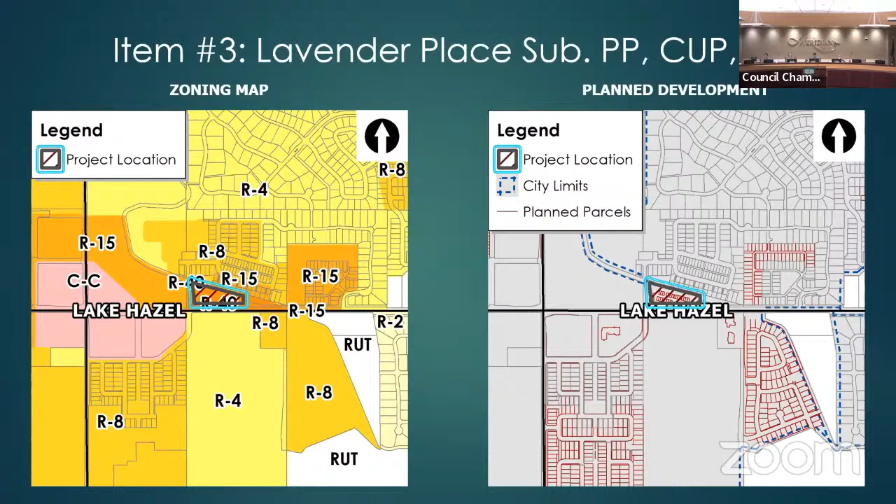The application is for a preliminary plat consisting of 4 single-family attached building lots and 26 single-family townhome lots on the 3.8 acres, a conditional use permit to construct the townhome lots within the R40 zoning district, and as noted, a private street application for access and 3 alternative compliance requests for common drive standards, private street standards, and off-street parking.

Lavender Place was annexed into the city in 2020 as part of Lavender Heights. As part of this annexation, the subject site was approved with the R40 zoning district.

The applicant is proposing the project to be largely alley loaded, with all but 2 of the proposed units fronting on green space to comply with the private street applicability standards. Subsequently, multiple detached sidewalks are included for added pedestrian connectivity through the site, with the proposed plat of 30 residential units and the requested land use of alley loaded single-family attached and townhome units.

The applicant is introducing a new housing type to the overall Lavender Heights subdivision. In addition, the proposed placement and site design offer great pedestrian connectivity to the nearby Discovery Park, which is directly to the south across Lake Hazel. It also has great access to the remaining open space and amenities within Lavender Heights to the north.

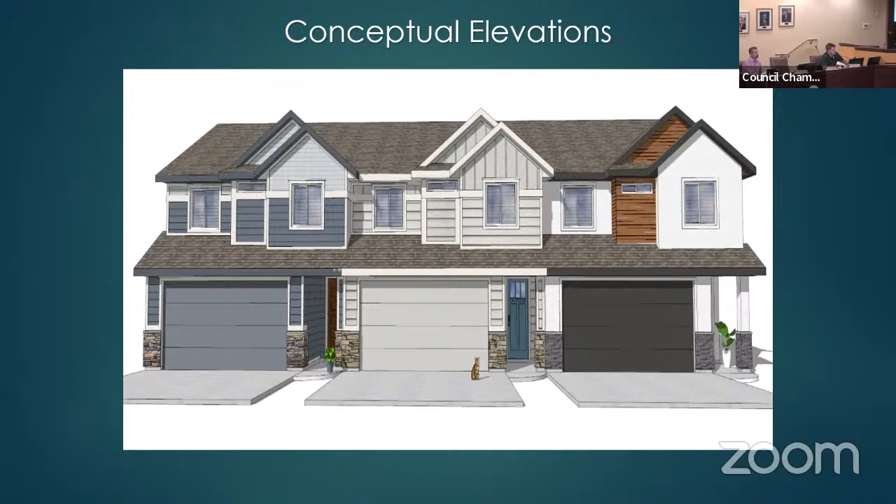According to the submitted conceptual elevations, which is here, and the applicant also has more in their presentation, the applicant is proposing to construct these homes with similar style and materials as the detached single family in the Lavender Heights subdivision to the north.

These facts help staff support the project in terms of the comprehensive plan, as well as to be compliant with the previous approvals. The project does comply with all UDC requirements except for those related to the alternative compliance requests.

The applicant is requesting alternative compliance to the private street standard that prohibits a common drive from taking access from the private street. Also requesting alternative compliance to the off-street parking standards for the parking pad requirement for 3 and 4 bedroom homes, and alternative compliance to the common drive standards requiring no more than 3 lots off of one side of the common drive.

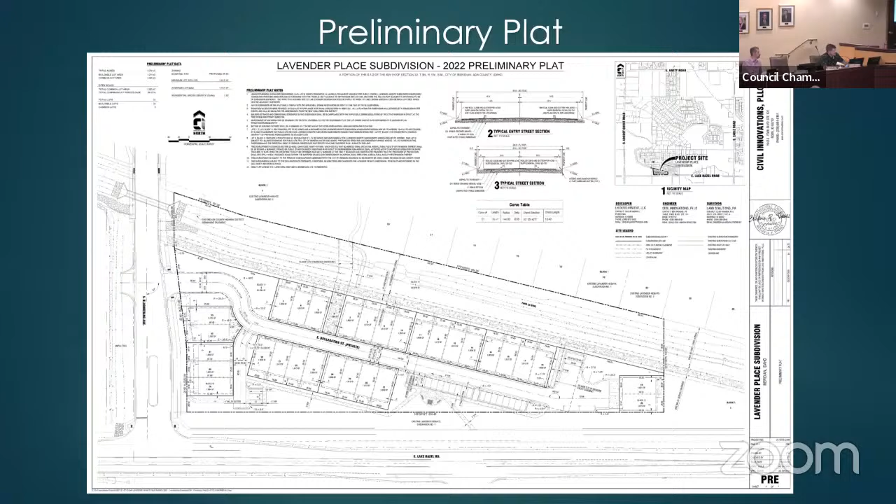The staff and director have approved these requests, but have offered an alternative solution to the requested off-street parking alternative request.

Per the submitted parking exhibit, the applicant is proposing to alternatively comply with the off-street parking standards by providing 18 parking spaces that will be designated for each specific unit, as color coded here.

Each of the proposed units is shown with a 2-car tuck under garage, providing the required off-street parking for 2 bedroom homes and meets the requirement of a 2-car garage for a 3-bedroom and 4-bedroom unit.

However, due to the odd shape of the parcel that creates the constrained building area, the applicant has proposed private streets and an alley loaded project that does not readily allow for the required 20 by 20 foot parking pad for each unit that contains 3 or 4 bedrooms.

The applicant placed the parking spaces directly across the private street from each unit to minimize the distance that future homeowners would have to traverse to access their designated parking spaces.

In addition to the 18 parking spaces designated, the applicant shows 7 additional guest parking spaces, which might be a little hard to see, but there's 3 here, 3 here, and 1 here, which would be 7 total.

Note that parking is prohibited on the private street, as well as along Lake Hazel to the south and South Bloomerang to the west. So there's no available on-street parking surrounding this development, unless they parked within the local street here, which would be very illogical.

Staff does find that the applicant's proposed alternative, as shown here, is one option of meeting the intent of the off-street parking requirements when accounting for the required density of the development agreement, which has a minimum of 30 units, as well as the site constraints and limited access for the site.

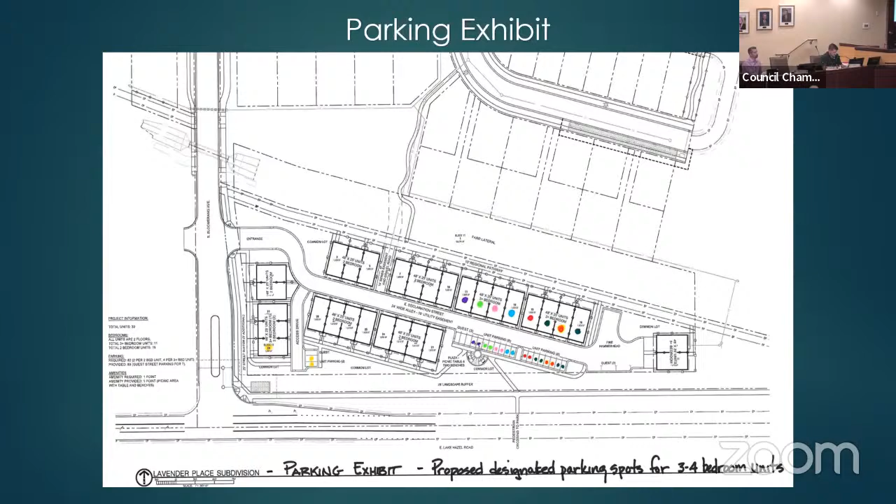Staff's other recommended site design revision is in regard to adding a micropath lot to the development to further the north-south connection through the project. Staff recommended adding a micropath connection here, which would require this building to shift 10 feet, or a mix of this building shifting slightly to the west and this one shifting to the east, in order to accommodate a 5-foot micropath lot and 2.5 feet of landscaping on each side.

This would allow the applicant to add an additional sidewalk segment by the plaza as well - basically connecting these sidewalks here, for the purpose of increasing north-south connectivity through the site, because this is a great connection, but it just stops. There's no real sidewalk or pedestrian connection for residents to get to the arterial or collector sidewalk, which would allow them easier access to Discovery Park. That's why staff is recommending this.

Staff also has concerns with the placement and design of the driveways for lots 32 and 33, which would be these ones here. Due to the design of the private street, both of these driveways are deeper than 5 feet, the minimum garage setback for an alley-loaded product, but are not 20 feet deep to accommodate an actual off-street parking space. Staff is concerned that these substandard driveways will encourage residents to park in a way that would also inherently inhibit safe vehicular movement around this curve near the entrance of the site.

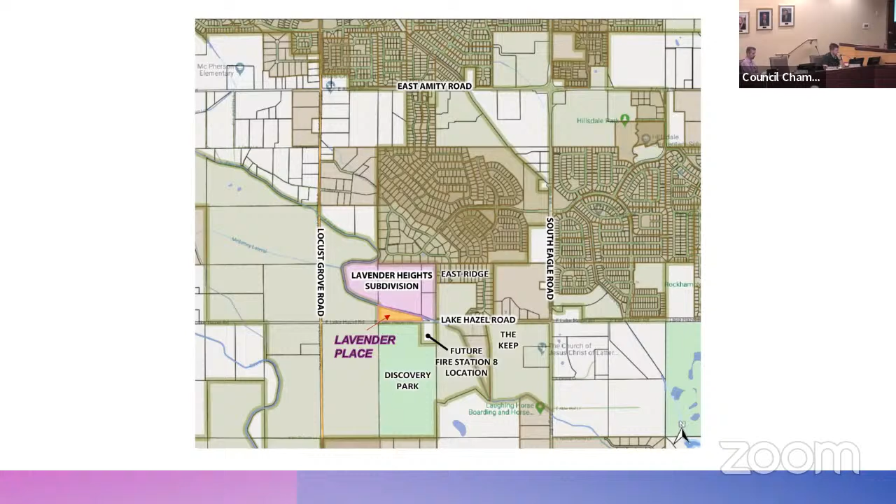Next slide. This is an overview of Lavender Heights and the already subdivision that's in the works on the north side. You can see the canal kind of wraps the property and bisects Lavender Place from the rest of the development. There's a 10-foot wide regional pathway that parallels that waterway and also cuts through the north side of Lavender Place - that was one of the things we're trying to integrate into this design.

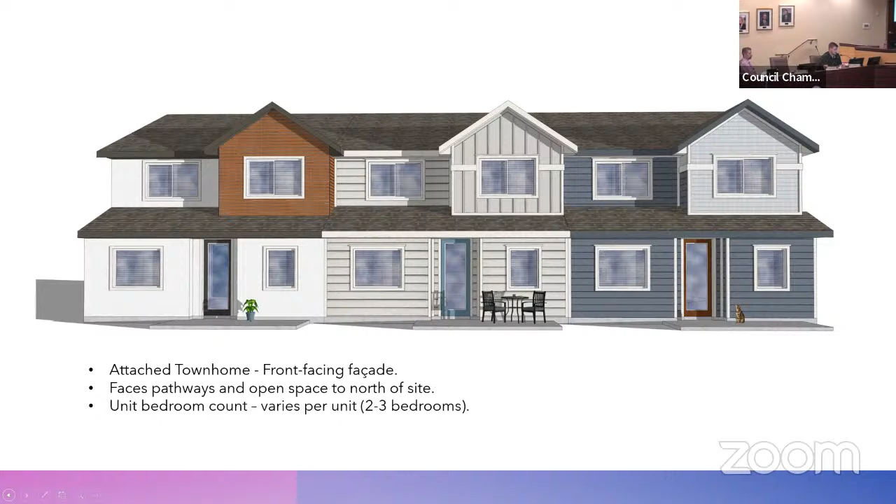Here's kind of reiterates the building design and elevation. All of the units will be 2-story, and then there's a mix of 2 to 3 bedroom units, trying to maximize that density.

Well, this is essentially the same thing I just talked about, FLUM designation - that is frontage on the green space where the front door faces the green space. This is a good slide too; it shows part of our site constraint, that Farr Lateral irrigation ditch on the north, which is an amenity in itself, but it takes up a large square footage of the site, and that triangular shape was part of our challenge.

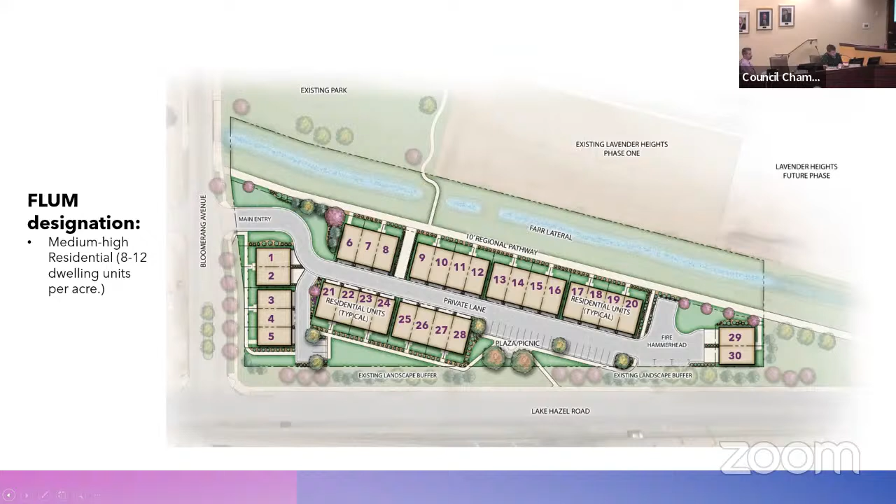So this slide identifies those similar options. We've got the 10-foot regional pathway, and then we are proposing a plaza picnic space as an added amenity that ties into that pedestrian way. And then note that Discovery Park is to the south, trying to allow for that pedestrian connection and use as an additional amenity.

This shows that parking. I should probably go ahead and say I've read through the staff report, and we are in agreement with Joe's recommendations, and are willing to comply with the conditions of approval, be that, I guess, but the parking modification to allow for more visitor parking was one of those items. Right now on this plan, what we're showing there is the same thing, where we've got 2 parking stalls for each of the 3-bedroom units, but switching that to allow for more visitor parking, that's fine with us.

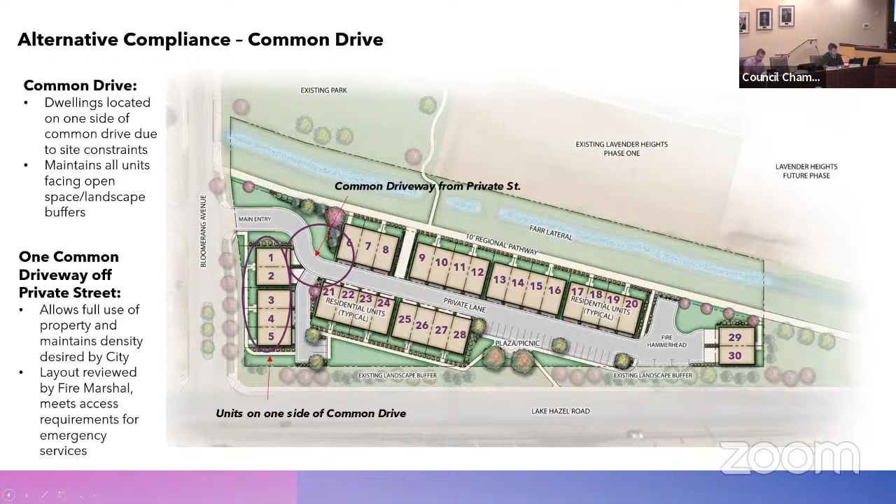So this identifies that corner there, and I think we have a solution. I don't see that as an issue. We're glad to make that modification, as well as extending the pathway in between the units on the south to allow for that pedestrian connectivity, and extending the sidewalk on the south, as Joe had mentioned. We've worked very closely with Joe as well as the fire marshal to come up with this design and make sure we're meeting all of the needs of the city, allowing for adequate emergency vehicle access.

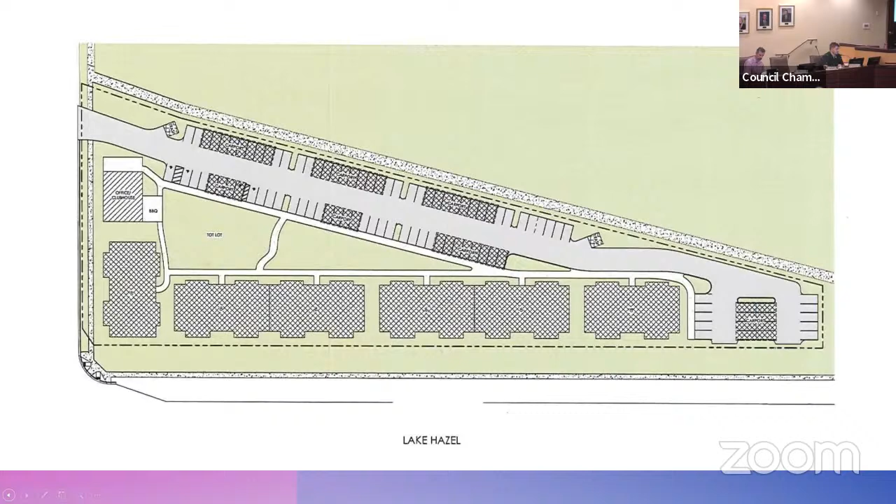Spoke to that. This is actually the old multifamily concept that was used when we started the project 2 years ago. That's there if we need to discuss it. Stand for questions.

Okay, anybody have any questions for the applicant or staff? Mr. Chair, Commissioner Lorcher, go ahead.

Staff expressed an idea of possibly changing the 3-bedroom units to all 2-bedroom units. Is that something that you and staff considered in regard to establishing more parking? We had considered that, we had talked through that option. One of the big goals was to try to maximize density here, and originally it was slated to be multifamily. So this is kind of where we landed on that point, to try to provide a mix of housing option as well as maximize that density and provide adequate parking.

All the units do have 2-car garages, but then, per the code, the 3-bedroom units need to have additional parking available. Due to the alley load concept that we have here, where the garage side fronts that private lane, they do not have a traditional 20-foot driveway in front of the garage.

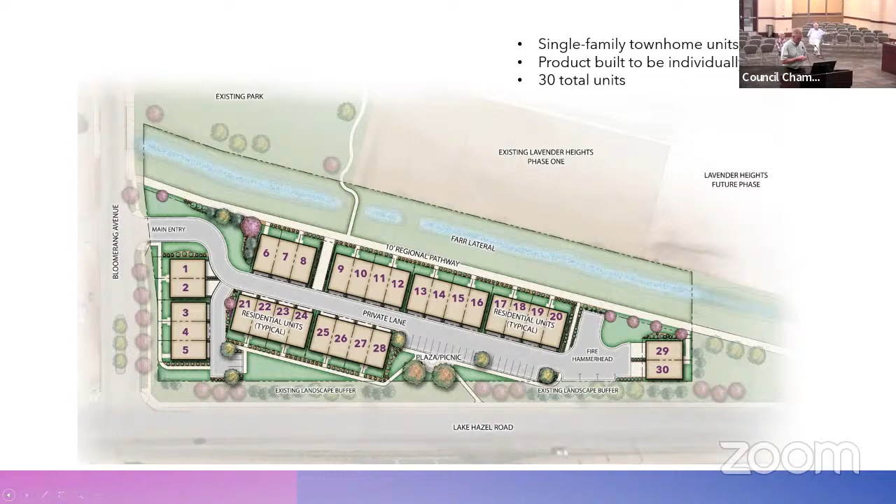Mr. Chair, it is not lighted. There is a right-hand turn lane off of Lake Hazel though, into this, onto that collector road. So for the safety of the community of Lavender Place to be able to access the park across the street, what would be their way to be able to access that park safely?

That's a great question. I know that Lake Hazel is slated for road frontage improvements by ACHD due to the timing of the project; those have not been installed at this time. I do know that that 10-foot wide regional pathway that comes through there, you can see on this overall plan, extends to the east, and I anticipate that it continues on, and if there would be a crosswalk at that location to allow that crossing.

Mr. Chair, go ahead. Yeah, this is a great question, Commissioner Lorcher. This came up at the original hearing for Lavender Heights. The other collector road, so we kind of have one at the quarter mile, and then on the south side, it's going to be one at the half mile, directly east of the fire station lot, which is right here. That is where the anticipated crossing for the multi-use pathway will be located, not at the Boomerang one.

Any follow-up? I'll state the question a little more plainly. How disruptive is it going to be if we recommend making all these 2 bedrooms? Because in my mind, a compromise isn't letting you go without parking by minimizing the amount you have to provide.

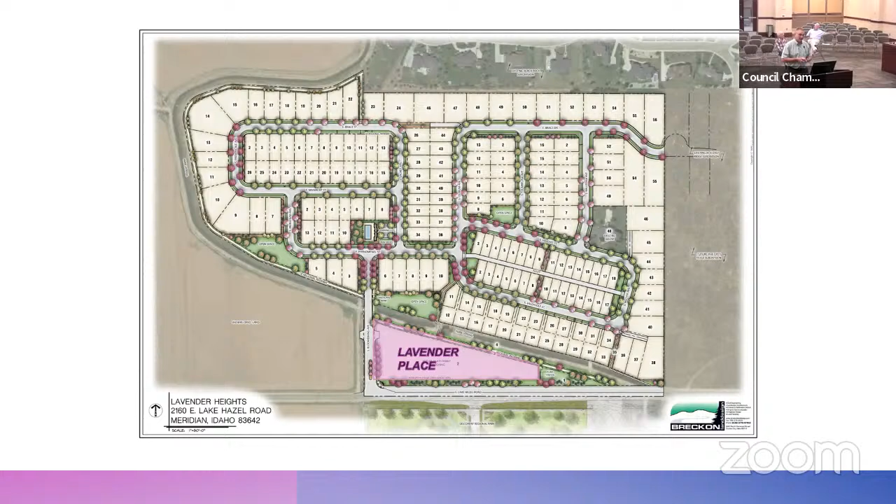We could maybe take another look at it if we could at least have some 3 bedrooms in there. I guess the question would be, we're meeting the code requirements at this point. What are we going to hold ourselves to if we're going to modify that? Is there a certain number we need to hit, or if we're meeting the letter of the code, what differential there would be appropriate?

Okay, I understand that. It sounds like you guys have done a significant amount of work with staff. To be honest, with staff recommending just 1 parking spot as a concession, I tend to try and support staff in the decisions they make, since they are infinitely more wise than I am in a lot of ways. That said, this one is just a tough one for me personally.

Mr. Chair, I'll also just note that each one of these units does have a 2-car garage, and the majority of them are 2-bedroom already.

Understood. As far as trash services and things like that, how do you envision that happening? That was another big one I had here. How are you going to get a trash truck in there, and how does everybody have a trash can out there on trash day? Well, the rollaway trash units would fit into the garage, and that was part of the reasoning to have that 5-foot apron in front of the garages there. It is a very efficient design.

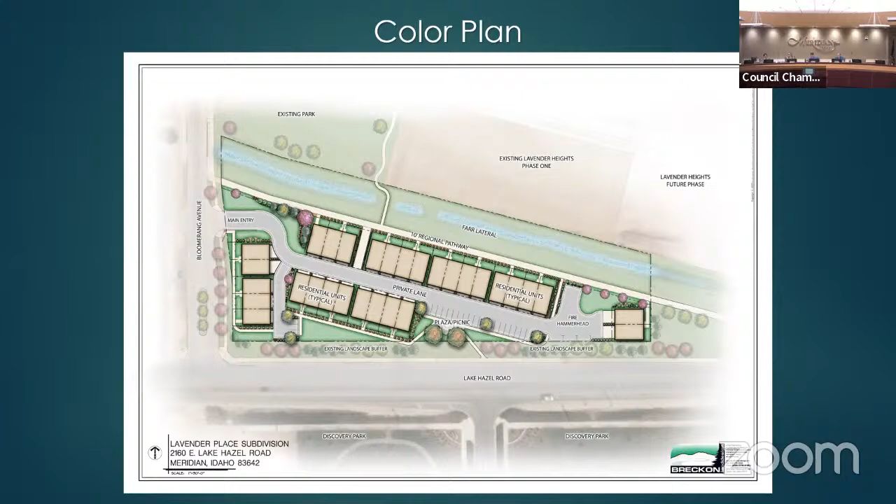Thank you very much. Appreciate it. Always interesting to work through those.

Mr. Chairman, I'm sorry, can I just seek clarification? Commissioner Lorcher, were you a yay or a nay? I'll say yay. Yay, thank you. Yep.

Okay, and with that, I'd like to open public hearing for item number H 2022-0038, Torino Locust Grove subdivision.

And we will begin with staff report. Thank you, Mr. Chair. Before I start my presentation tonight, I'd just like to inform the commission that Alan Tiefenbach has tendered his resignation with the city, and as of tomorrow he'll no longer be employed by us. He's accepted a new position in Whitefish, Montana. So we wish him the very best, but I thought you'd like to know. He's very excited for his new opportunity. So if you see him out and about here in the next week or so, tell him hi and wish him the best. Absolutely, thank you.

Lucky guy. Yeah, he feels pretty lucky. He's beaming from ear to ear. All he wants is to get his house sold.

Okay, back to city business here. All right, thanks Bill. So I'm filling in tonight, obviously, for him. I told him, since it is your last week with the city, I'll go ahead and take one for the team tonight and present this project for you. So tonight I'm here to present the Torino Locust Grove subdivision. It is an annexation and short plat request this evening. The property consists of approximately 1.03 acres of land currently zoned R1 in Ada County, and the applicant is here to request annexation to the R8 zone and develop it with 4 residential single-family lots.

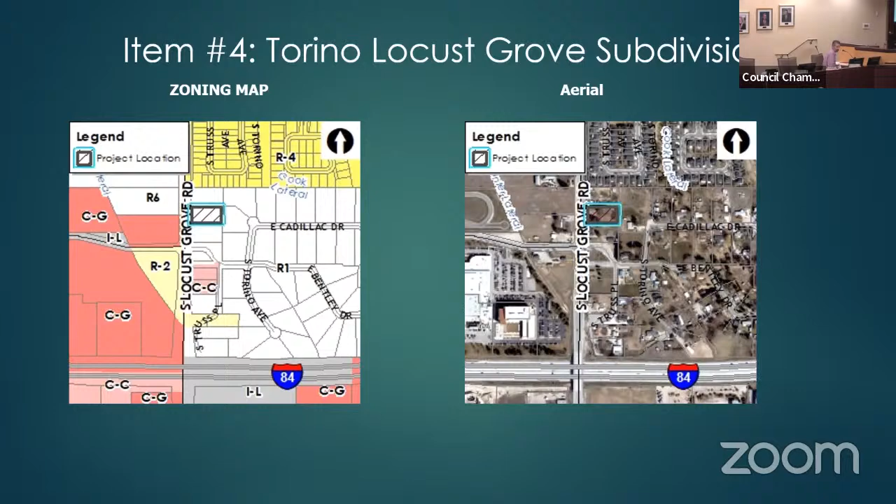This property does not have access to a local road like we typically see in our subdivisions. It is an infill, so the only access point for this project is from Locust Grove. The applicant this evening is proposing a common driveway, your favorite, to serve as access for the proposed 4-lot subdivision. Typically we'd like to see a public street extended or even a potential private street, but under the city's ordinance, private streets are not allowed to connect to arterial roadways. In this case, the code does not prohibit common driveways from connecting to arterial roadways, so that's what the applicant's doing.

The common driveway itself is actually 20 feet wide, but the easement to serve the common driveway is actually 30 feet, because they're extending sewer and water mains into it so they could provide services to the back lot. You can see that staff is recommending a change to the conditions of approval in the staff report.

I placed that condition in the hearing outline I prepared for you. I've wordsmithed that, there was an error. I hope the applicant is here tonight or at least online. I wanted to inform him that the code requires a common driveway be in a common lot, not

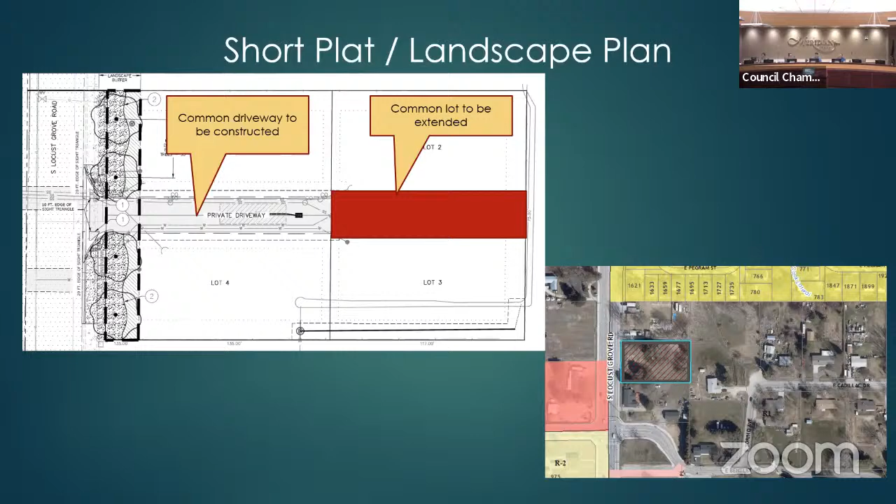All right, at this time I'd like to open the public hearing for file number H-2022-0030, Overland and Wells 2, and we will begin with the staff report.

Thank you, Mr. Chair, members of the commission. The next application before you is a request for a conditional use permit. There is also a concurrent development agreement modification application going along with that. It does not require a formal recommendation from the Planning and Zoning Commission tonight; council is the decision-making body on that.

This site consists of 11.65 acres of land, 18.75 acres for the overall site. It's zoned CG and is located at 2600 East Overland Road. This property was annexed in 1994, and a development agreement was approved in 2016, which was later amended in 2020. A preliminary plat was approved later in 2021, which included the adjacent property to the east. A final plat has not yet been approved for this property. The comprehensive plan future land use map designation is mixed use regional.

The applicant has submitted an application for a modification to the existing development agreement to change the development plan on the northern portion of the site from a retail grocery store to multifamily residential. This application does not require action by the commission. As I mentioned, City Council is the decision-making body on this, as well as the concurrent conditional use permit application.

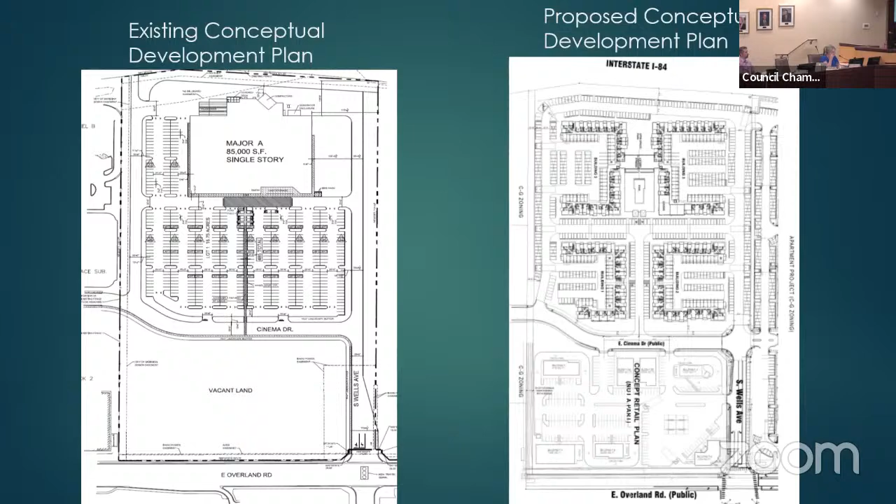A minimum of 3.18 acres of common open space meeting the standards is required, or alternative compliance may be requested. The common open space exhibit submitted shows 2.55 acres proposed, consisting of linear open space along the north and west boundaries of the site, a park with grass consisting of 9,803 square feet in area, a large amenity area, rooftop terraces on the clubhouse and leasing office, and street buffer and additional common area along East Cinema Drive.

There is a 20-foot wide sewer easement located along the west boundary of the site with a 14-foot wide access road that will prohibit landscaping in that area. Therefore, much of that area will not be able to be counted toward the minimum open space standards. Staff recommends revisions to the plans to comply with the minimum standards, and that an updated common open space exhibit be submitted prior to the council hearing.

Amenities are proposed for the development exceeding the minimum standards.

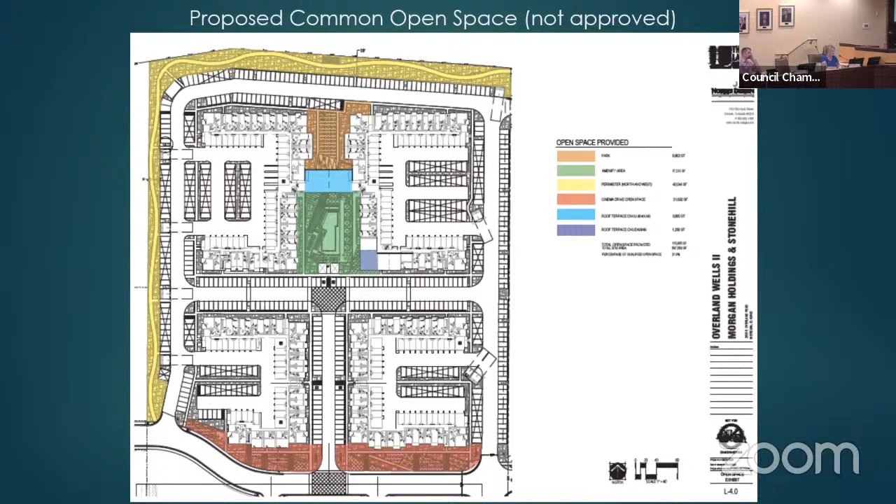Conceptual building elevations and perspectives were submitted as shown for the proposed structures. The two northern buildings will be 4 stories in height, the two southern buildings will be 3 stories, and the clubhouse will be 2 stories. A modernist vernacular theme of design is proposed with a monochromatic color palette of off-whites and shades of gray, with lap siding accents and decorative balcony railings for color and texture. Final design is required to comply with the design standards in the Architectural Standards Manual.

Written testimony was received from Greg Goins of Winco Foods. They are in support of the proposed development, and they are the property owner. Elizabeth Koeckeritz of Givens Pursley is the applicant's representative.

They did submit a response to the staff report. She is asking for condition number A3, which requires a final plat to be submitted, approved, and recorded for the second phase of the subdivision to create a developable parcel, prior to submittal of a certificate of zoning compliance and design review application. The applicant is requesting approval to submit the CZC and DR applications after the final plat for this phase has been approved by council, but before it's recorded. The findings for the first development agreement amendment and preliminary plat require the property to be subdivided, meaning the final plat has to be recorded in order for the subdivision to be legally subdivided, and that is required prior to submittal of any CZC and DR applications for the site. Therefore, this request cannot be granted.

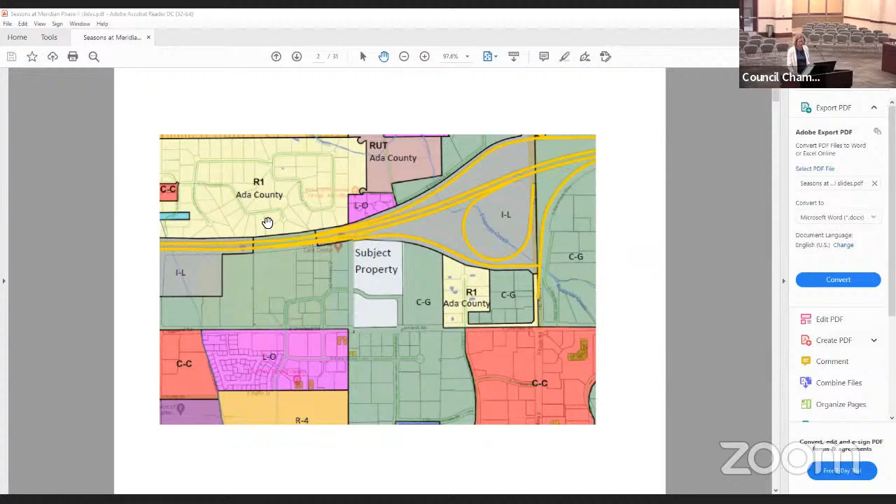The applicant is proposing to develop phase 2 of the Seasons at Meridian apartments on approximately 11.65 acres at 2600 East Overland Road. As Sonia mentioned, the site was annexed and zoned CG in 1994. In 2016, the city approved a development agreement governing the site to the east, where the applicant is developing phase 1 of the Seasons at Meridian, the parcel before you here today, and the site to the south, which is still slated for commercial development. The 2016 development agreement allows development of the site at Overland consistent with the concept plan. The concept plan that was approved shows an 85,000 square foot retail building north of Cinema Drive, with vacant land to the south.

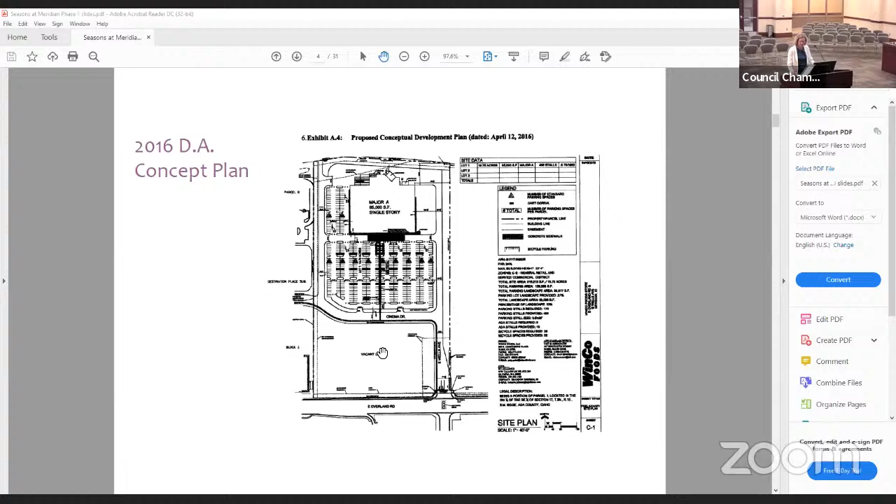However, since then, Winco has decided not to develop a new store at this location, but also does not want to sell the property to another commercial or retail developer. So they've entered into an agreement to sell the property to the applicant, Morgan Stonehill, who proposes the multifamily residential use on this property. To develop the western parcel where Winco originally intended to develop, the DA requires a DA modification to include a new concept plan consistent with the mixed use regional designation in your Comp Plan.

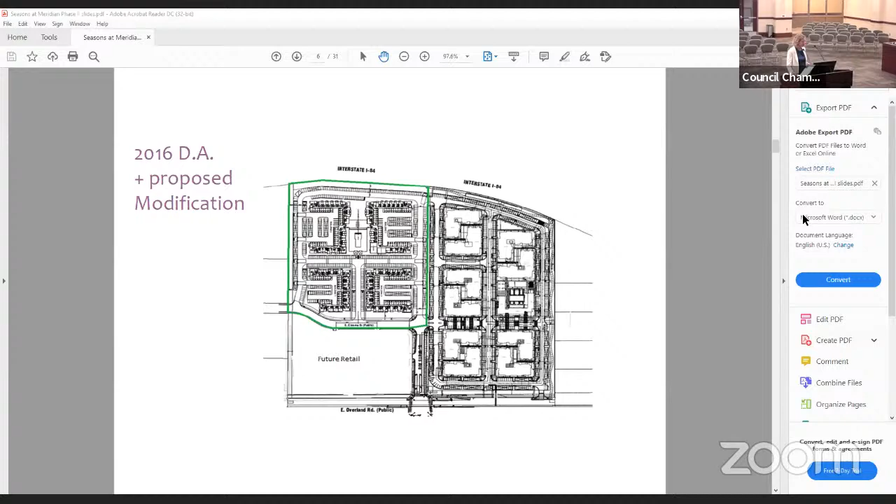The proposed multifamily use and development plan is consistent with the designation in the Comp Plan because it contributes to the mix of uses that are desired in a mixed-use regional area by adding needed density, higher density residential in this area that's really developed with a lot of retail, hospitality, and office development and very little multifamily or even single-family homes. This mixed use region is really large, it's 650 acres. The mixed use regional designation calls for a mix of employment, retail, and residential, with residential densities between 6 and 40 units per acre.

As explained by Sonia in her staff report, the proposed plan provides housing for nearby employment uses and contributes to the mix of uses desired in this designation. The adjacent commercial development to the west provides retail, restaurant, and entertainment uses, which will be utilized by the residents within easy walking distance. The proposed apartments continue a nice transition between the single-family residential to the east and the large commercial center to the west that includes the movie theater.

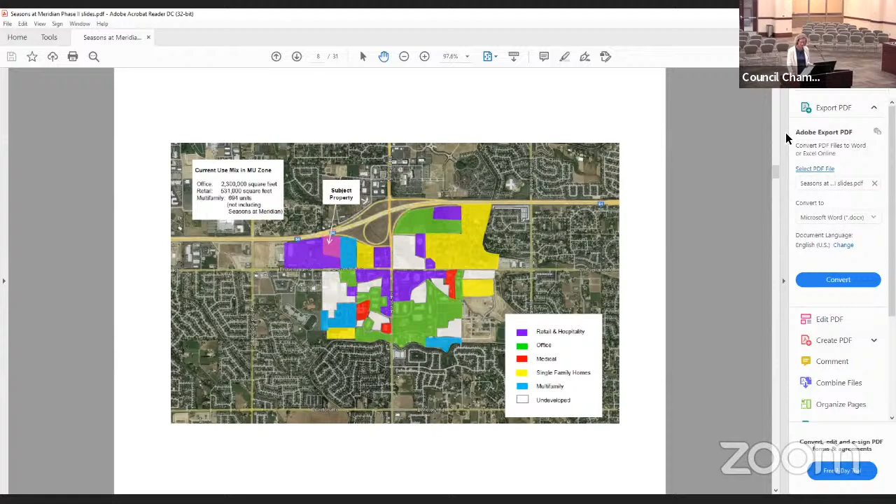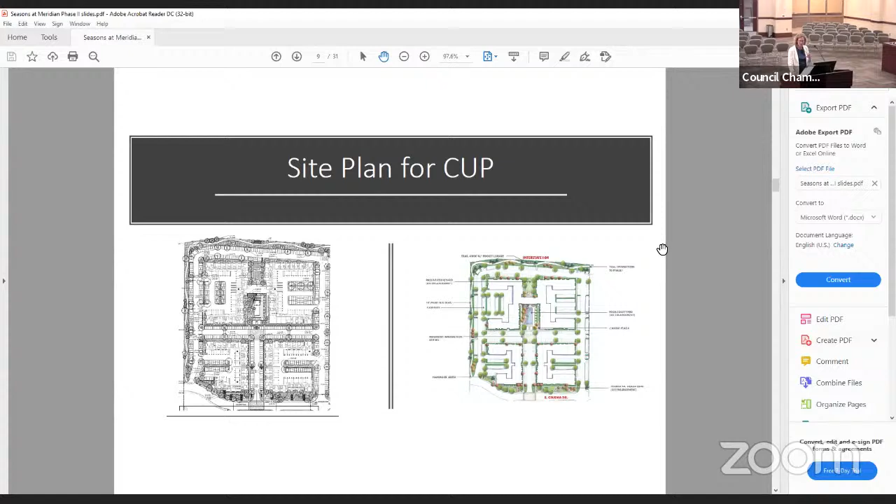In addition to the DA modification, and consistent with the CG zoning, we're also requesting approval of a conditional use permit for multifamily use. Seasons at Meridian Phase 2 proposes 351 apartments with a density of 30.13 units per acre. The site includes 4 horseshoe-shaped buildings that allow for really dramatic streetscape perspectives while concealing much of the parking in the internal areas and garages. It provides open space area to create neighborhoods centered around parks that allow for active and passive recreation and gathering.

As you can see from this aerial map showing the arrangement, it really highlights how well this arrangement creates that urban-like block pattern that's called for in the comprehensive plan for the mixed-use regional zoning. It frames the open spaces, it really sets them aside. It's interlaced with landscape pathways throughout this development, connecting both the apartments to the east, the cinema to the west, and the proposed commercial to the south. It all really connects and integrates throughout this whole region.

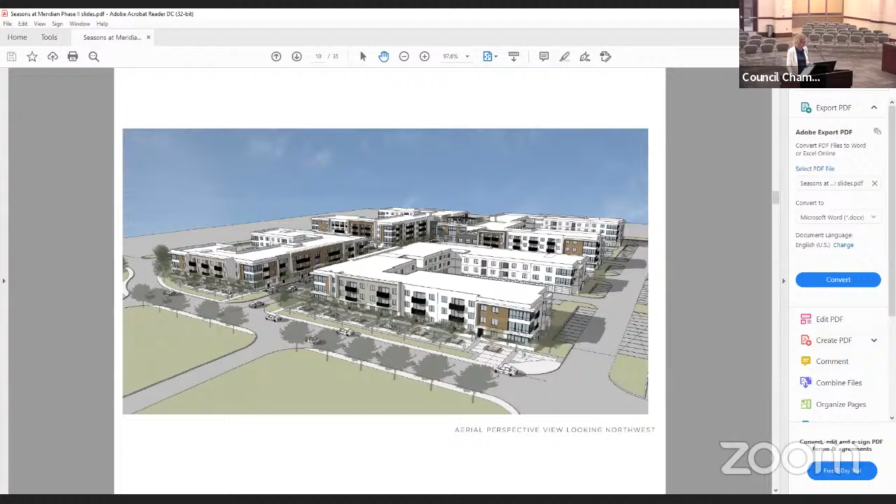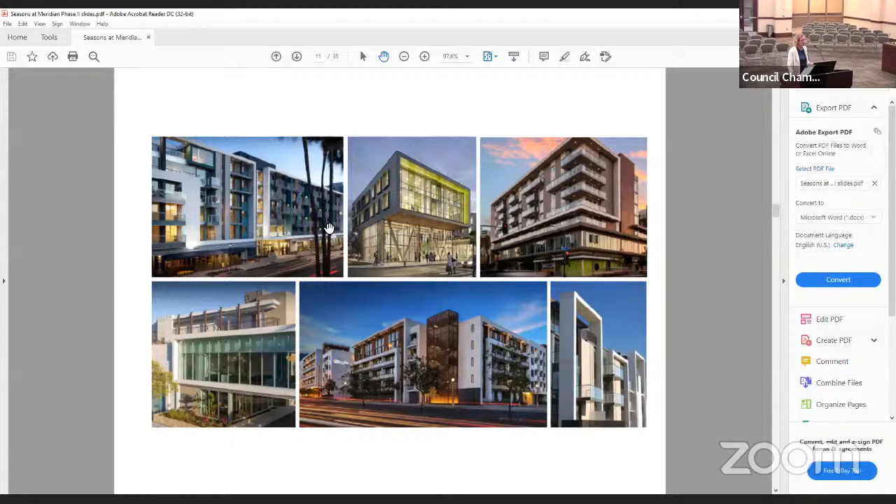The architectural theme, as Sonia mentioned, is a more modern vernacular, drawing inspiration from the aesthetics of the international style. It's really bringing something new and different. There's a lot of more traditional farmhouse, modern farmhouse styles in Meridian, and this is bringing something new and exciting to this region, to this area.

The Seasons at Meridian Phase 2 apartments will include a mix, as mentioned, of studio, 1, and 2 bedroom units. Plus, one thing really feeding into this mixed-use designation is the applicant is proposing 3 live-work units on the far western edge, where people can actually live and work, operating their business right there where they're working.

The units will range from 569 square feet to 1,159 square feet. Each unit has been designed with expansive private patios and balconies, with a minimum area of 80 square feet, which really creates this great indoor-outdoor space.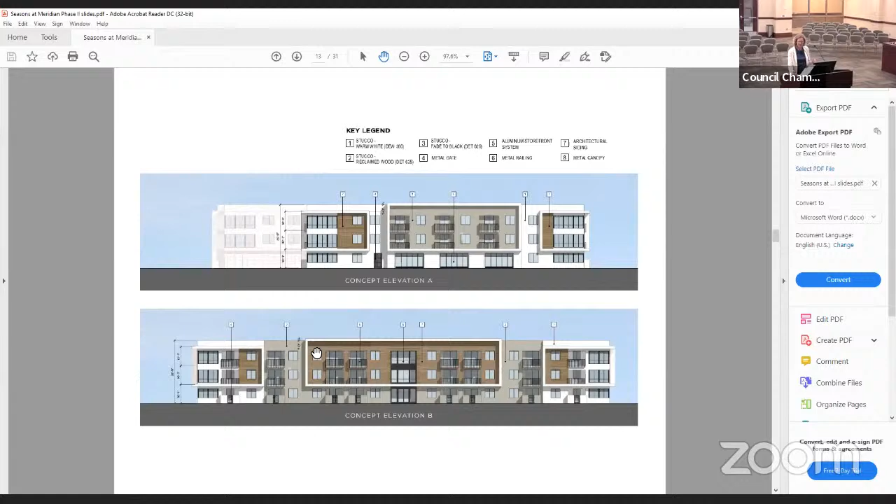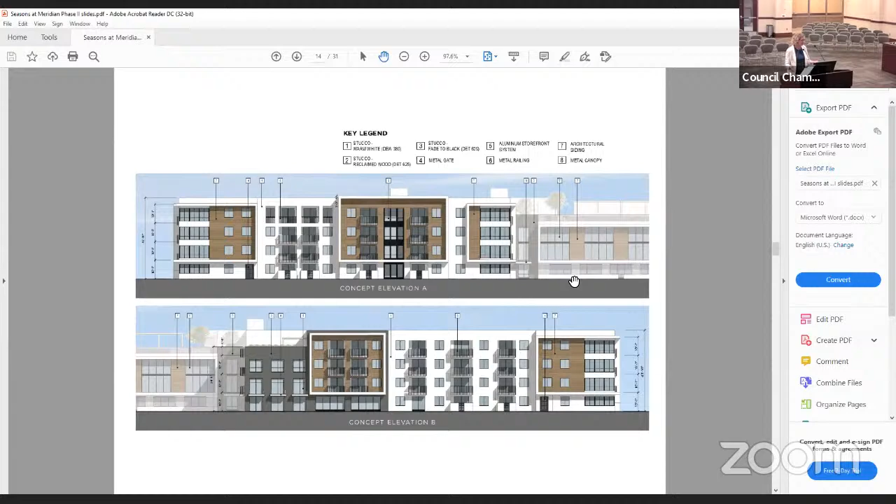So speaking a little bit more to the overall look, as you can see on these couple of pages with the elevations, this approach has a lot of clean lines, shadow box frames. The color palette is muted with off-whites, grays, and some browns, and decorative balconies and railings. But it creates a really exciting looking building in an area where there are a lot of buildings that just look like the same 3-story apartment walk-up you see all over the place. This is really trying to offer something different here.

So we have been working on the open space exhibit, and based on what we've been going back and forth on with Sonia over the last couple days, much of the western border that we were including in the open space calculations is ineligible to be included in that open space calculation.

So right now, as it stands, the development has 15.9% qualified open space, which includes a wide perimeter walking path on the north. Part of the qualified open space includes part of the walking path on the west, but whether it's included or not, it's still going to be there and landscaped as a very nice amenity. Both those pathways connect down to the south, to the east, and to the west.

There's also what's really cool about this, and what I think will speak to a lot of the young professionals and professional couples moving in here: above the clubhouse, as part of the open spaces, there's a large rooftop patio, and a second rooftop patio, sort of a wine bar space, above the building on the northeast corner, where you'll be able to look down into the pool area or out across to the mountains. There's also a large grassy area.

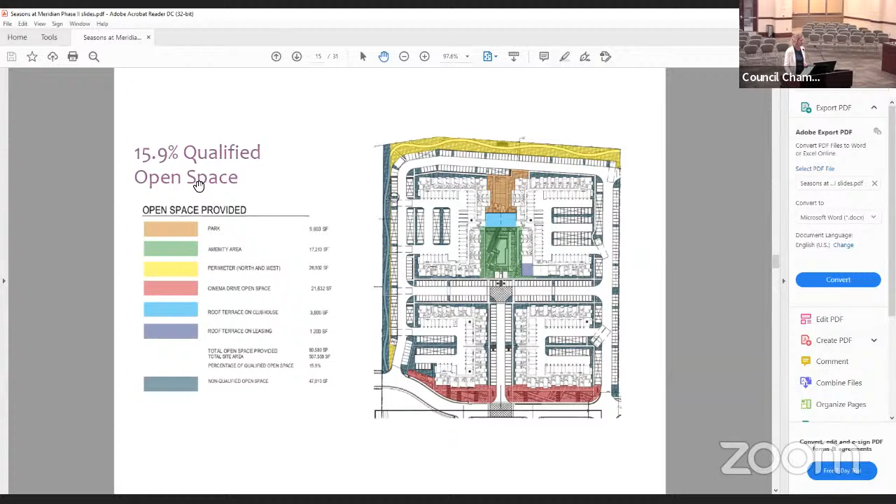There are significant buffers. This does abut Interstate 84, actually more near the off ramp, so cars will be decelerating as they pass this development and the one adjacent to it rather than at full traffic speed. On the north, the buildings are set back over 100 feet from the property line, with a 35-foot wide buffer and a walking path along it. On the west, there's also a walking path, with a buffer of 22 feet. On the south, it's much larger, but just directly against the street there's a 10-foot wide buffer.

There is a significant amount of open space, and these are really nice amenities. I'm going to show you some pictures. This is a really highly amenitized project that's going to lend itself well towards younger working professionals, individuals, couples, that sort of people. The Cinema Drive Plaza is really going to be a seamless transition from this area into the multifamily, into the commercial to the south.

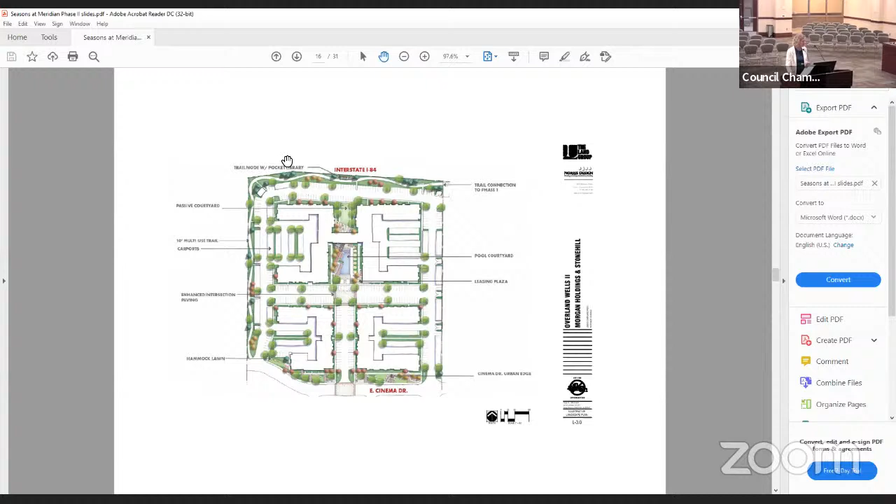There are 15 qualified amenities, and depending how you count them, it's always a little tricky if there's 15 or 14 or 20. But there is a clubhouse that includes a game room, a coffee bar, parcel lockers accessible 24/7, a business center, classroom stations, event space, Wi-Fi, HD TVs. There is a 3,500 square foot fitness center that will include yoga and spin studios. There are also 2 rooftop gathering and community spaces that are a really nice amenity to look out over towards the mountains.

There's a pocket library, which was new to me, a little area with some chairs and books so you have a quiet place to borrow a book and return a book. There are grills and fire pits, and they're looking at some public art throughout the space, finding local artists to design it. There is a large grassy area between two of the buildings well in excess of the 5,000 square foot minimum. There are courtyards, hammock lawns with 6 separate picnic areas, and the rooftop terraces I mentioned. There's a pool and multi-use perimeter paths that connect everything. And in this day and age, there are charging stations for electric vehicles, since we anticipate certainly people with electric vehicles residing here.

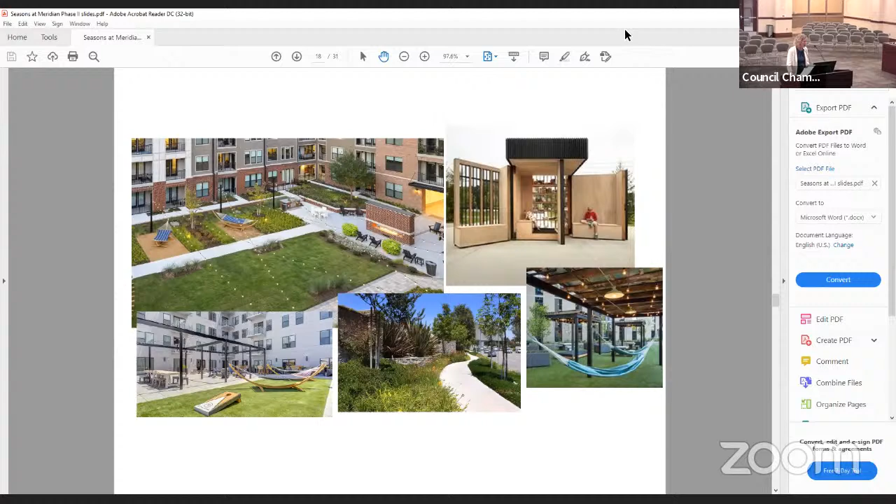This slide just shows some imagery and concepts for the quality of the design of these outdoor gathering spaces. You can see examples like the hammock lawns, the pocket library, and really nicely landscaped pathways.

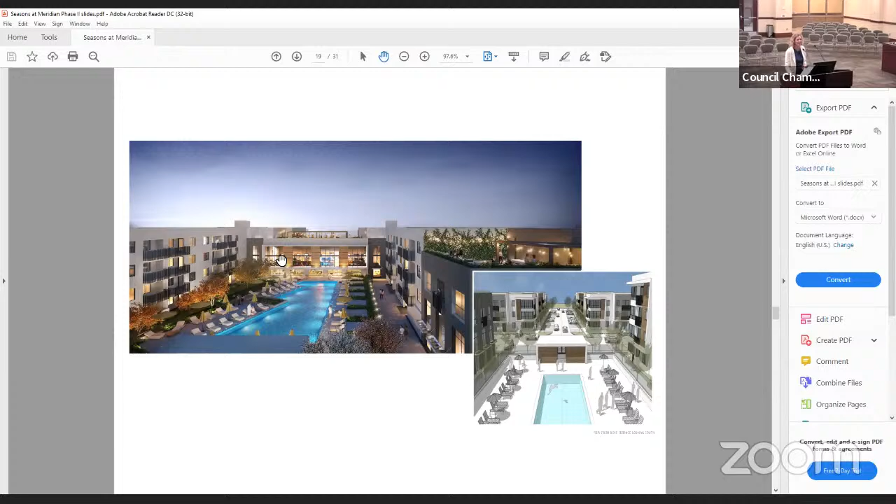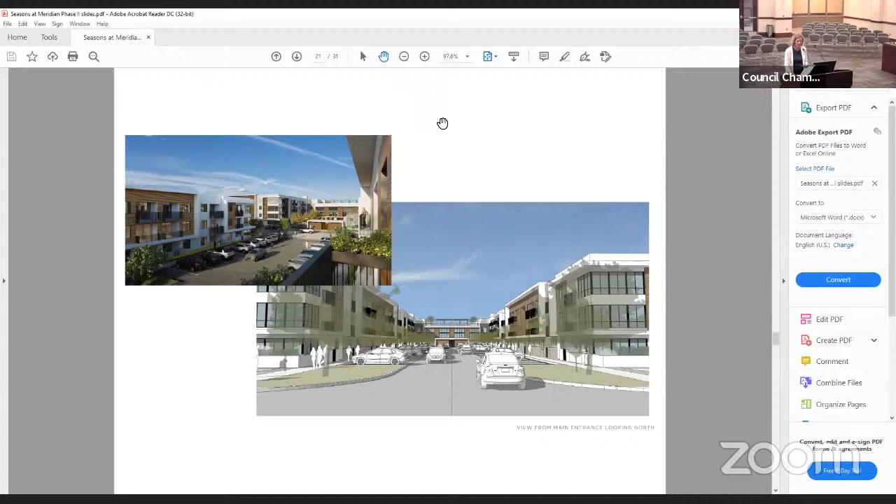As Sonia mentioned, there is plenty of parking—it's overparked for what the city of Meridian standards are. There are over 653 parking spaces in total, including 353 garaged or covered parking spaces. Some units have garages, and there are quite a few carports across the site to protect the cars.

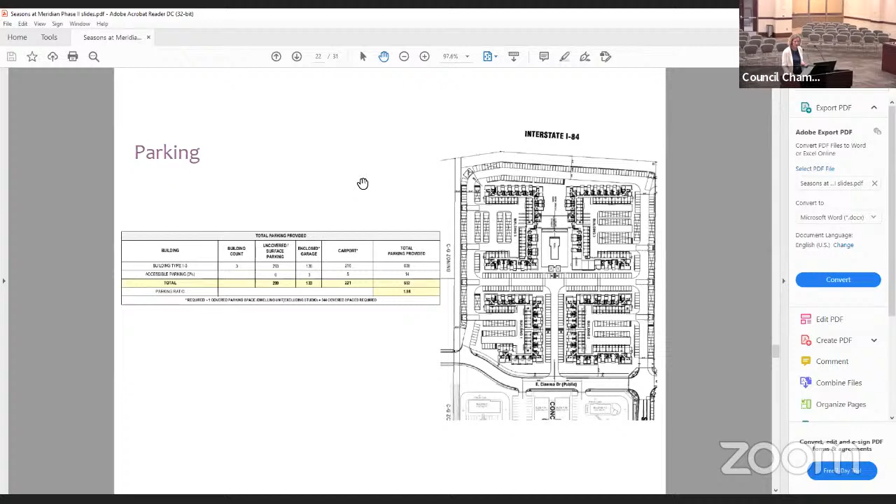On traffic, ACHD reviewed and approved the traffic analysis for the development. Importantly, and I'll end on this since I know there are a lot of questions about it: there is traffic in this area, but this development actually has significantly less traffic than the Winco would have. In fact, there are 51 fewer AM peak hour trips, 547 fewer PM peak hour trips, and 659 fewer Saturday peak hour trips.

Services can all be met. The applicant is in full agreement with all of the terms and conditions of approval. We just ask for your recommendation of approval of the DA modification and a recommendation of approval of the CUP. I'll stand for questions.

All right, thank you very much. Does anybody have questions or concerns for the applicant or staff?

Sure, go right ahead. Thank you, Elizabeth. Had a question concerning Cinema Drive. That's going to be lighted, correct? Or is there going to be a lighted intersection there off of Overland into Cinema Drive headed northbound?

So Cinema Drive is on the south boundary, and below that is the vacant space. The access will be from Wells Street. Wells is being required, both as a condition of approval from ACHD for this and the other development, to be turned into a full access intersection. It will have a stoplight and dedicated turn lanes.

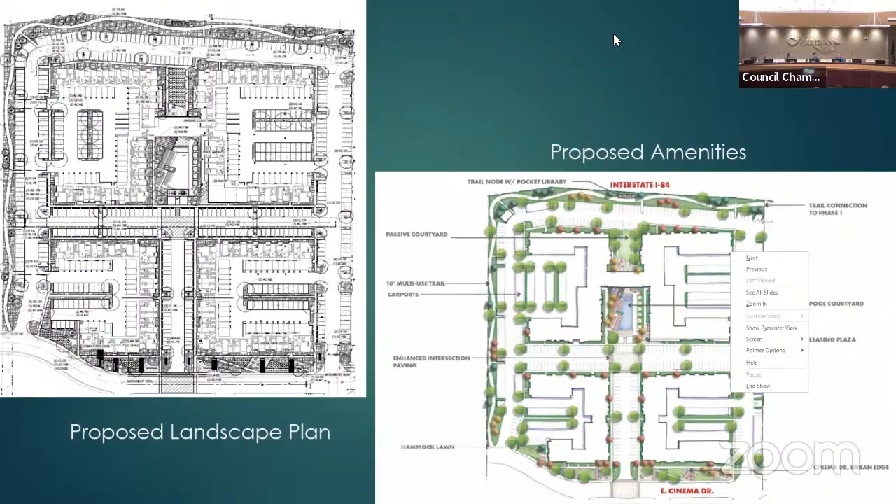I thought it'd actually be more of a gain putting in multifamily here. It seems to fit with the area. We just approved something similar to this off of Fairview near Eagle Road, something I would look at as kind of similar to this. And traffic's always just going to be an issue when these things pop in.

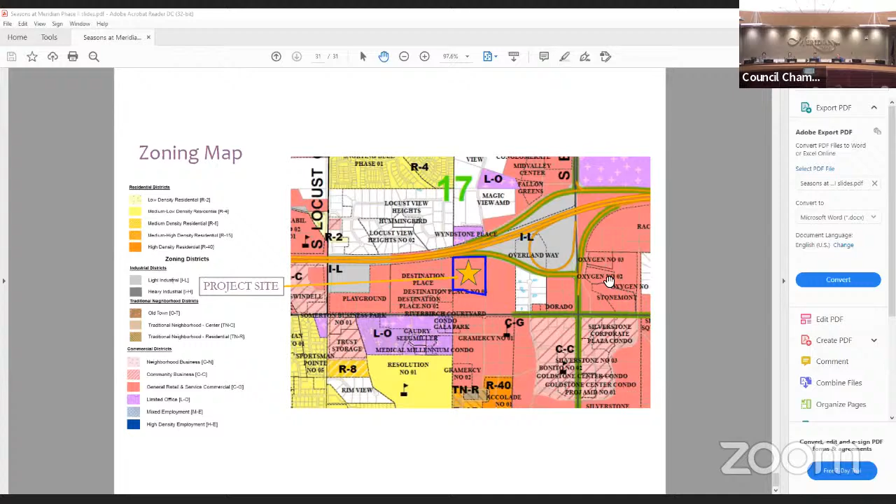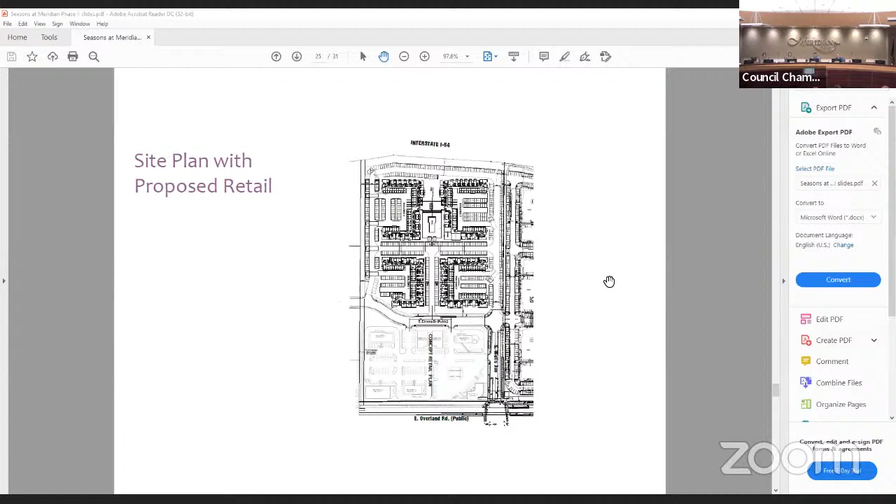I know that, and I like the design and I like the way it's going to look unique. I like some of the more upscale amenities the developer is thinking about putting in here. It's going to give it a really nice feel, and I can see it definitely being a hangout spot for the residents, running across to grab some food and coming back, or making it themselves. So that was something very nice. Okay, thank you. Thank you, staff.

Interesting. Okay, so for disclosure, I live a mile away from this place, so I'm very familiar with the traffic patterns here. It's going to be tough on the traffic side of things. But whatever you put in there, Winco is going to make it even more congested than this apartment complex. And we definitely need more apartments in that area.

I guess what I'm saying is I like the way it's going to look, and I like the project itself, and I like the creativity in the design. It's not just a simple straight face with some relief on it. They're actually putting in some really upscale type of work.

It's just, once again, the traffic thing, but we're going to get that no matter what. And I think it's too much to ask for a widening or a turnout lane or anything like that. But I could suggest putting in a pickleball court, because that looks like it could happen. I saw a little space for that on the north end. So you might want to consider that. Okay, there we go. We'll put that in the approval - make sure the pickleball court gets made. Just kidding. That's all.